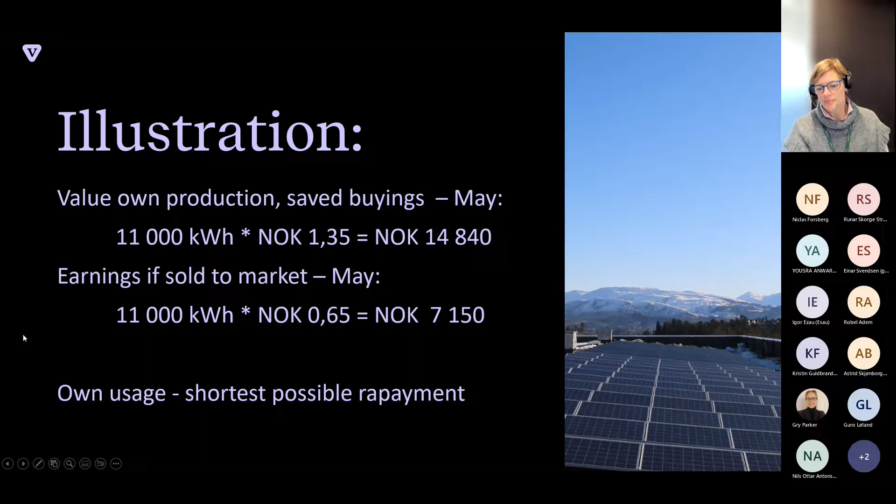So to sum up, the essential of the model that Runar is going to show you is matching. It's like Tinder for solar plants and buildings. The essential of the model is displaying hourly usage per year and finding the best match with estimated solar production on a specific site. And the goal is to optimize the investment to get the shortest possible repayment period.

That means that Runar and Volte is needed. So I pass the word on to Runar.

Okay, thank you. Yes, I'm Runar. I'm a master student at the Integrated Master Program in Energy, and I'm also working 40% with analyzing data in Volte. So I will start by sharing my screen.

And Anna, can you give me a heads up if you're seeing it? Okay, good. So then I will try to explain what you are seeing.

So as Anna said, we are looking to best illustrate how a solar panel will affect the economy of your building, so the electricity cost.

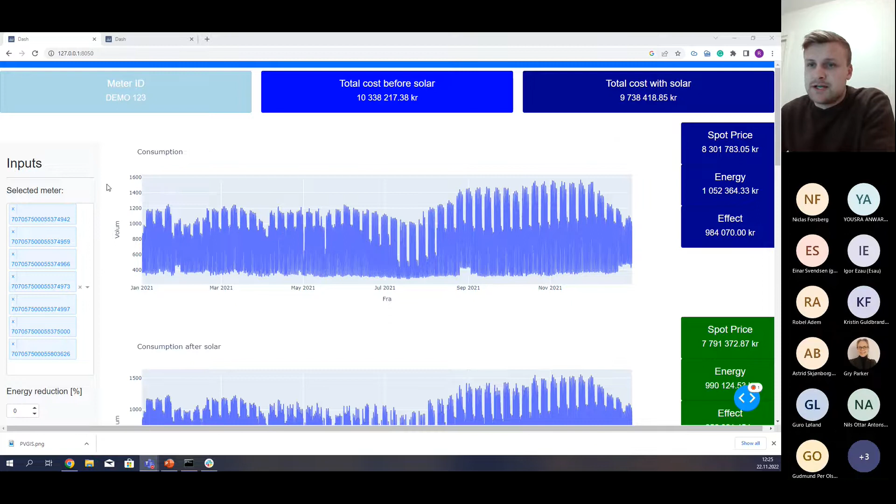So what you're seeing on the left here is our inputs, and the first input is the meters for the given building, so the smart meters. As Anna said, all of the electricity consumption for the meters in Norway are stored in Elhub. So we have data for most of the metering points back to 2019, which means we can have a good understanding of how the consumption looks like in that building.

So on the graph here on the right side, we can see the consumption for all of these meters. With what hopefully will be the new regulation, the top metering point here will be the one actually connected to the solar panels, and the rest of them can virtually share the production. So if you're producing more than you are consuming on one metering point, that doesn't really matter because you can share it to the others. Okay, so that is the consumption.

And then on the bottom here, I have a map, and what this does is when I click on it—so now I've clicked on the BI building in Oslo—this asks the PVGIS API for the historical production data. Not exactly production data, but what would have been the production in that area.

So we also inputted specifications for the solar panels, the tilt and also the azimuth, so if it's pointed north or south for instance, and also we have inputted here the installed capacity.

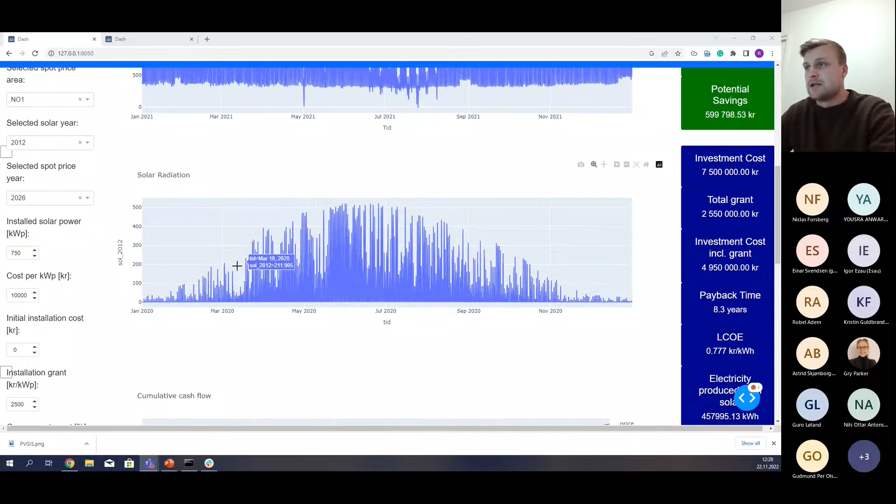And what you see in the middle here is that we have taken that radiation and put that on top of the consumption based on the regulations. So now we have what the consumption would look like at that given facility with this production.

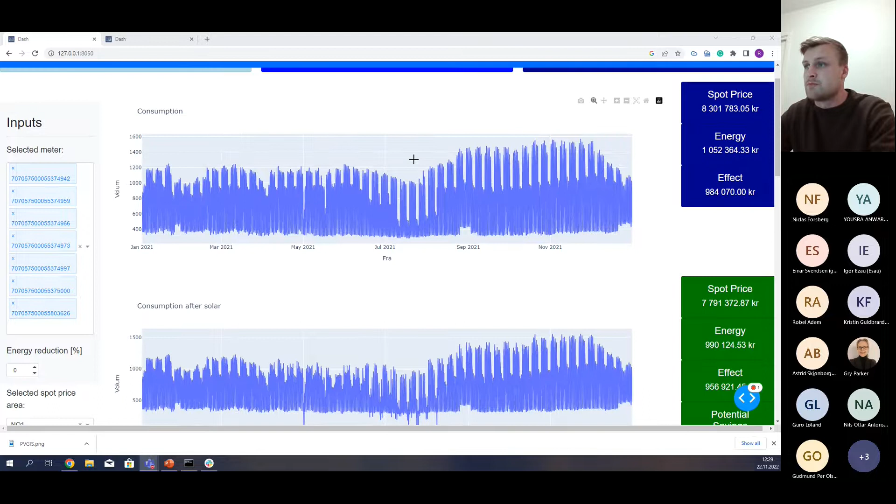On the right side here, we have calculated the spot price costs and also what you would have paid in energy tariff to your net operator, and also the peak demand charge. This is the charge you are paying because of your monthly peaks. We have those costs.

And we can see how this solar plant is affecting the different costs, and also we have a potential savings. If the solar year 2012 and the spot price year of 2026 is...

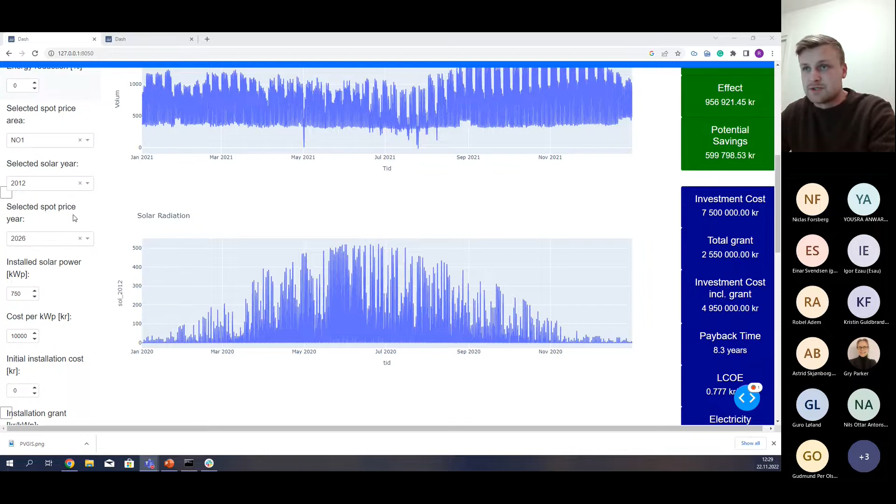If you believe that is true also for the coming years, you will have a payback time of 8.3 years. So we don't know, we are not sure how the spot price will look like in the future, of course. So what we have done here is that we have created some scenarios based on the spot price.

So we have from Eviny Fornybar, they have spot prices or electricity prices. It's not exactly forecasts, but it's like an assumption of how we think the spot price will develop up until 2026, and that is based on the future market, so Nasdaq.

So then we have like a daily profile and a weekly profile and then a yearly profile. We know that electricity is more expensive during the winter and during the day than what it is in the summer and during the night. And those profiles are then multiplied with some constant according to the future price.

So it can give a good, quite good assumption of how the spot price will be up until 2026. And what's happening after 2026 is more uncertain.

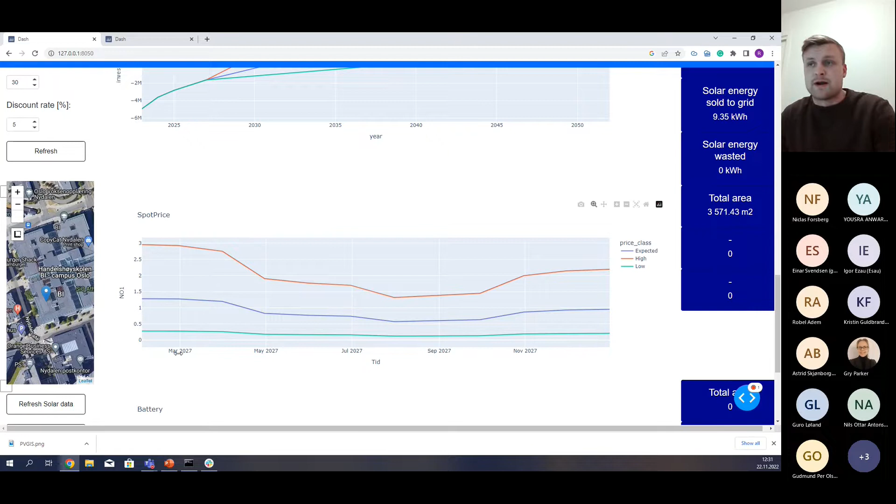So therefore we have created 3 different scenarios, where in the top scenario you are experiencing spot prices which are higher than we expect them to be. Then we have some expected value which is based on the average, or weighted average, on the future market and historical prices. And then we also have a low scenario where we'll go back to spot prices we saw before the pandemic.

And then we can illustrate these scenarios with this cumulative cash flow. You can see here at year 0, we are doing an investment, and then you're gradually saving the electricity costs because you're reducing the cost, and then you will eventually have it paid back.

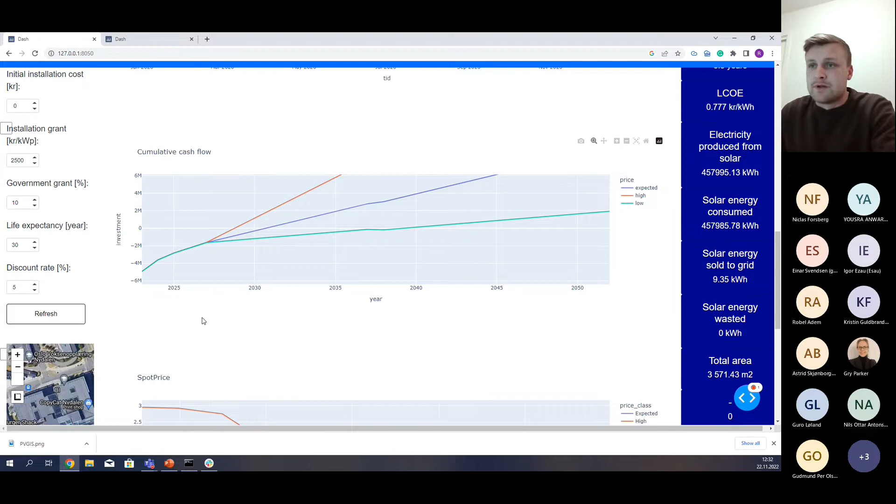And then in discussion with the customer we're doing the analysis for, we have to understand which of these parameters are uncertain. So for the cost per kilowatt peak, Anna has good experience in this field, so she knows approximately what this value should be.

But we also discussed this with Fusen and Solcellespesialisten. We could do that when we are looking at the given building, and then we get an understanding of what is a realistic price and how much it will vary. So typically maybe 7 to 10,000 or 8 to 10,000, depending on the roof.

And then we also have some parameters here for the grants from the commune and also from the government. Some of them are certain, especially in Bergen and Oslo, you're most likely to get this grant of 2,500 krona per kilowatt peak. But the government grant is less certain - we don't really know how that will end up to be.

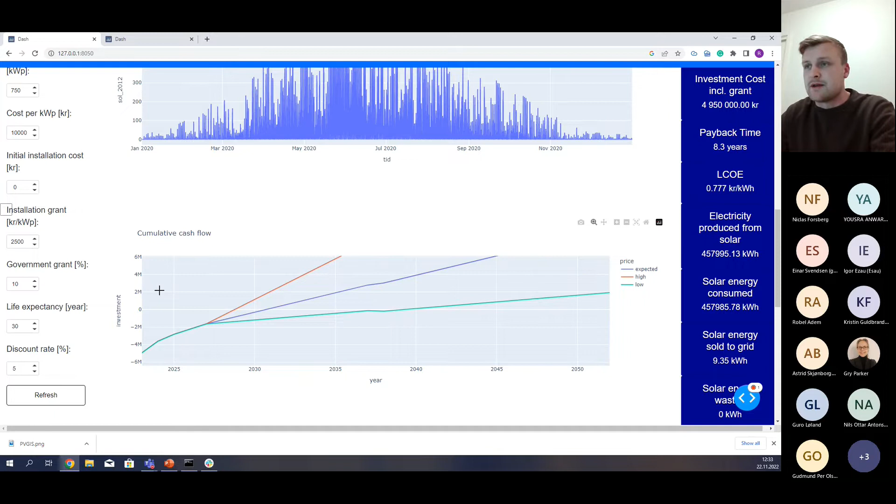So in discussion with the customer, we figure out what are the uncertain parameters here, and then we run different scenarios. And when we run these scenarios, we can illustrate to the customer what is the expected payback and what are the uncertainties and what we have to take into consideration. That of course helps, because then you get a much better understanding of the risk you're taking with making such an investment.

So then I just wanted to illustrate what's happening if you have maybe too large a solar panel, taking into consideration your consumption. So what you're seeing here is that during summer you are producing a lot more than you're consuming. That means that you are selling a lot more back to the grid.

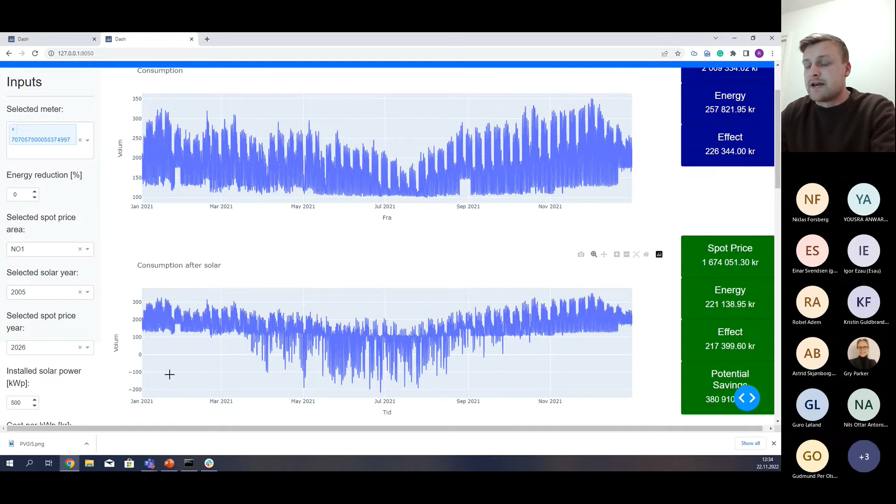But you're also producing more than 100 kilowatts than you are consuming, so you are only allowed to sell 100 kilowatts. That means that you are wasting energy. So this is the type of thing where we are able to illustrate with this tool and then show how it affects the economy of your investment.

So I think that was how we do this, and I think I maybe remembered to say everything. Is there anything you would like to add, Anna?

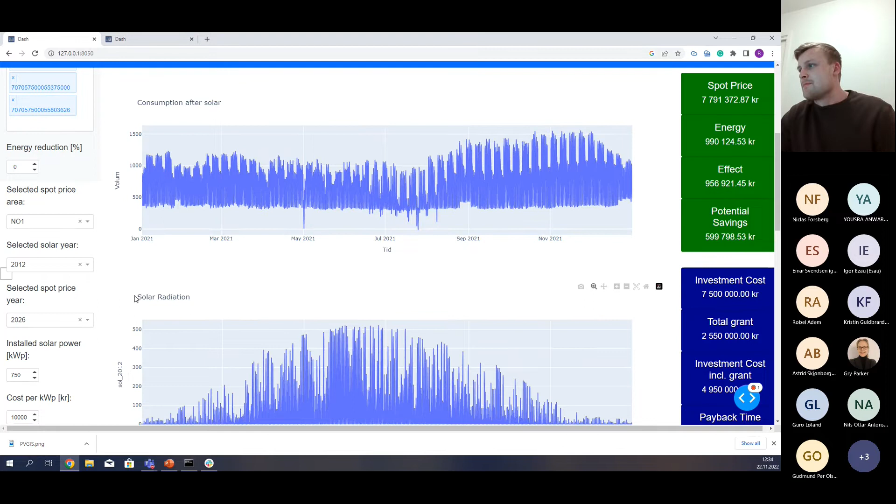No, I think that was perfectly fine, and we end up with the levelized cost of energy as well in this analysis, so that you can compare it with other energy prices if you are interested in that as well. And you sum up what is the expectancy of an investment during the lifetime of 30 years.

So as we have understood the clients we've been talking to, this is a fantastic way of understanding what solar can do in the energy mix of a specific building or an area with the same gårds- og bruksnummer, and to optimize the payback time.